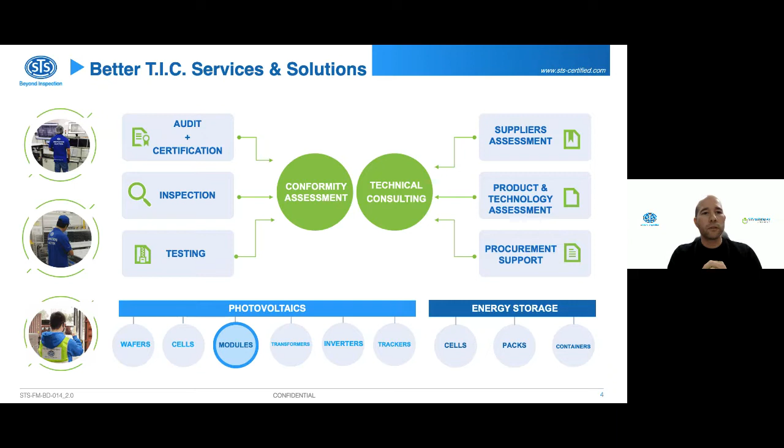Recently, we've completed a few projects. You can see a few of them now on inverters and on energy storage. We've got some exciting projects going on. It's not just a few days at the factory, but we are talking about months-long presence at the factories, whether we are following up R&D projects, products being developed, or whether we are really tackling more acceptance testing at the factories before shipment. And some of them happening at the power plant as well.

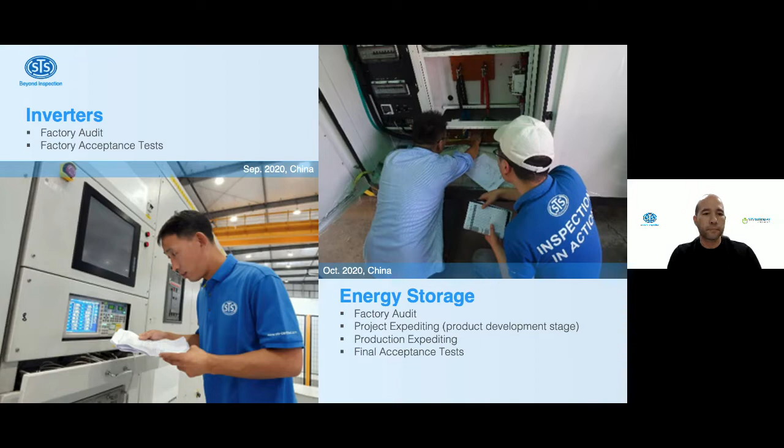So really you will start seeing STS present at many areas of the procurement and the lifetime of the power plants. So now you've all tuned in to hear our inputs on large wafers and large PV modules. So I'll give the floor to Frédéric, who is going to address those topics. Thank you.

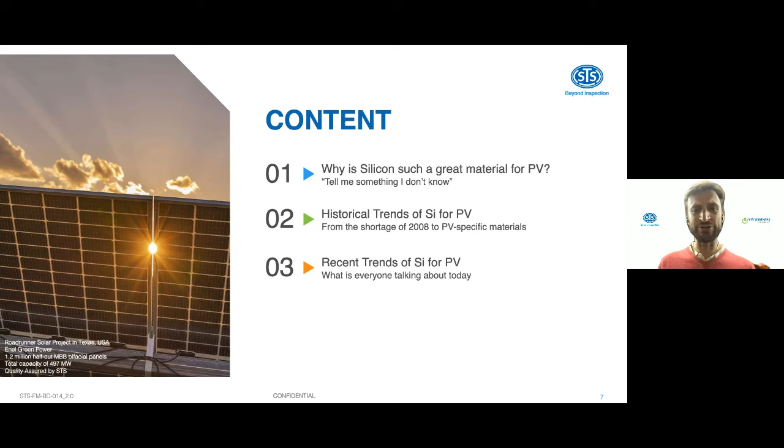First, I actually want to try to capture your attention by trying to find something that maybe not all of you know about silicon, although a lot of you have been in the field for a long time. So I'm going to take the challenge to tell you something you don't know. Then we're going to look at the historical trends of silicon for PV, and then we're going to look at the most recent trend that Alex touched a little bit upon. But first, why is silicon such a great material for PV?

Well, first of all, silicon is one of the most abundant. It's actually the second most abundant element on Earth. Some people in the audience will know that. It's still quite surprising to me that almost 30%, so almost a third of the Earth's crust is made of silicon. So go ahead, guys, install as many megawatts or gigawatts as you want. We will never run out of silicon.

And actually, even if the Earth runs out of silicon, silicon happens to be also the 7th most abundant element in the universe. So even if we run out of silicon on Earth because of PV, we will always be able to find some in the universe. As a matter of fact, cosmic abundance is usually cited in terms of number of atoms of the particular element per million atoms of silicon. That's just to give you the idea of how abundant silicon is in the universe.

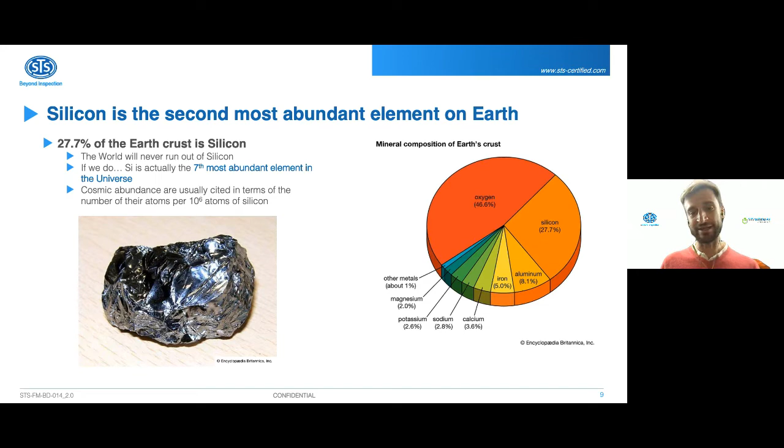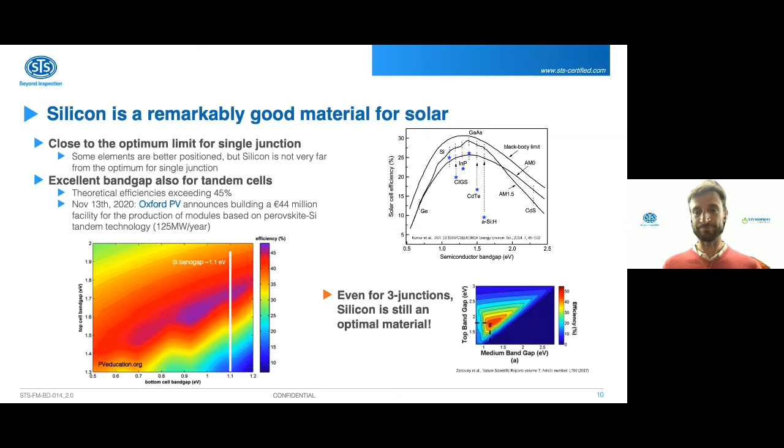And then if you were not convinced that silicon was really an incredible material for PV, when we want to go to 3-junction to go even further in terms of efficiency, well, guess what? Silicon is still an optimal material, this time for the medium band gap. You see that 1.1 is very close to the optimal band gap for 3-junction. Okay, so that was a short introduction on silicon.

Let's have a look now a little bit in the past, and let's see the historical trends of silicon for PV. And I want to start with actually the price of polysilicon because this story is quite interesting. So the price of polysilicon, when you monitor it since the 1970s until today, you realize that during the first 2 decades, it was following a cycle, and the cycle is actually well known from economists.

It's a cycle from commodities that take time to mature, and typically they refer to this type of cycle as the pork cycle. Basically, you have some demand for more pork or cattle, and then the prices go up. So you end up with a shortage, and at this moment, everybody thinks, oh wow, it's a good idea to breed pigs because the prices are high.

So everybody at the same time starts breeding pigs, and when a couple of months or years later, all the pigs are ready to hit the market, well, everybody is ready at the same time, and the prices collapse. The market is not attractive anymore, so people leave the market again, and then the prices go up again, etc.

You have a typical cycle due to the fact that it takes, and polysilicon is the same, several years to build a polysilicon factory. So you have these cycles which simply follow the cycle of capacity of polysilicon. But then what happened?

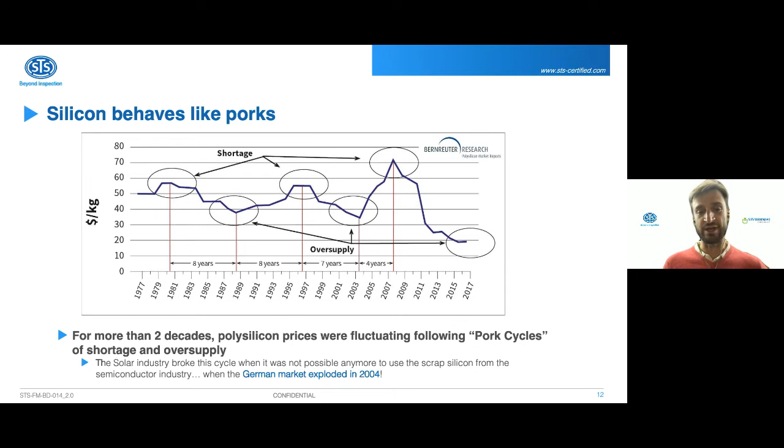And this surge was such that the material that was fabricated for semiconductors was actually not enough to feed the entire PV industry. And then you ended up with spot prices hitting close to $500 per kilogram. So that was really a very sharp peak.

And then everybody at this time thought, okay, that's a very expensive material. I'm going to build a plant so that I can put this material on the market. So there were a lot of plants that were built. Even module makers went upstream and built their own plant to ensure security of supply. So from 11 plants in 2004 to 61 in 2010, just to give you an idea.

All these plants arrived at maturity at the same time, so you can imagine the pork cycle took place again, and then the prices completely collapsed in 2009-2010. Other venues were tried, such as upgraded metallurgical grade, and there was also a performance indicator: you wanted to have as many watt peak per gram of silicon.

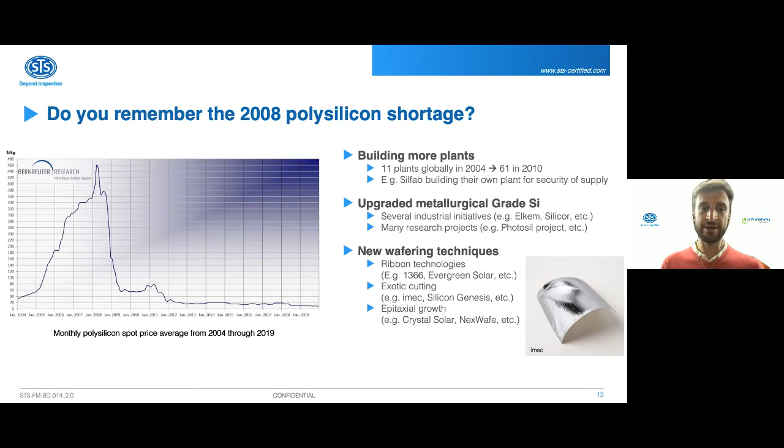So a gram of silicon was really a resource that was hard to get, so expensive, and there were wafering techniques, for instance, to reduce the amount of silicon per watt peak. Nowadays, most of these ideas have been abandoned because there has been a strong ramp up of polysilicon facilities, especially in China. But this effect was quite strong.

It was actually so strong that you see it on the learning curve, sometimes called the Swanson law, which plots the module price as a function of the cumulative module shipments. So typically, every time you double the cumulative module shipments, you decrease the price by about 20%. And you see that there's a bump here on this line, and actually the 20% is a fit.

And depending on whether you take into account this bump or not, you will have another learning factor. 20%, just to give an idea, is about a 75% price drop every 10 years. I think in the last 10 years it's been a little bit steeper, so we have actually dropped a little bit faster. It's more like 90% in the last 10 years, about 10% price drop per year.

So from a good to a bad, we actually now have our own polysilicon supply, and they are in the recent news. We will see that at the end. There has been a lot of movement on the supply of polysilicon.

So the metrics of grams of silicon per watt, or watt per gram of silicon, may actually come back, because the polysilicon is responsible for 70% of the energy demand of one module. So in markets where the carbon footprint may be an argument, you may have some comeback of these kinds of ideas, or at least moving the polysilicon plants to carbon-free, carbon-neutral, low-carbon energy sources. So that's one trend I wanted to talk to you about.

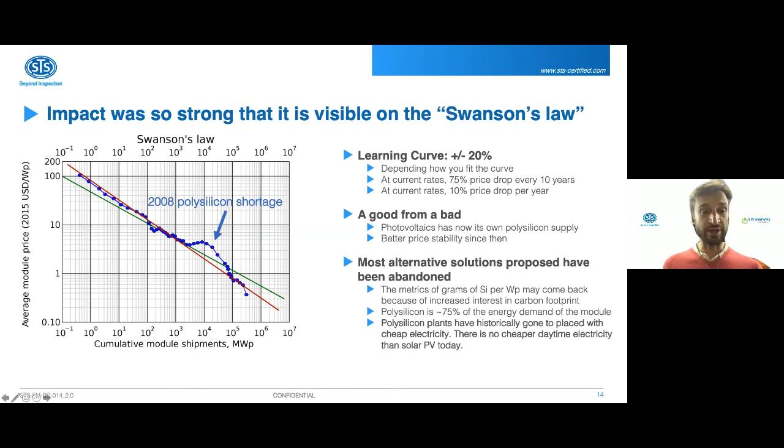Somehow the technology was favorable to the multicrystalline players. For instance, with the apparition of quasi-mono, the apparition of high-performance multi, and simply economies of scale, it was looking as if monocrystalline was going to disappear for PV. But recently, what happens is actually the opposite. There were some large investments from some Chinese companies, including in R&D, and I want to say Longi here, from 2015 to today, which have been really boosting the monocrystalline material.

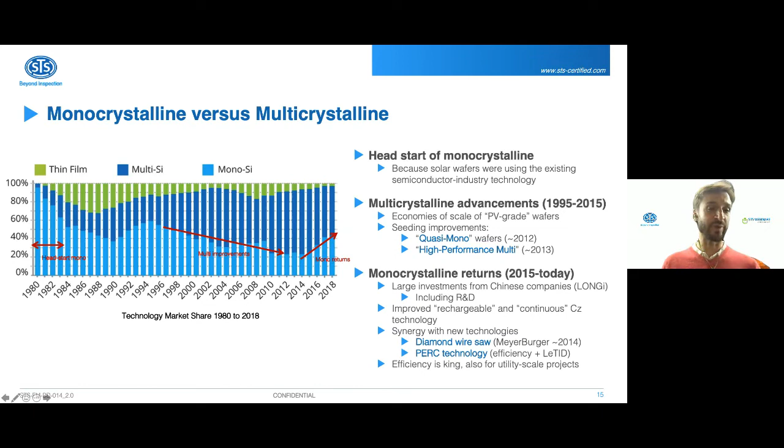At the same time, there have also been some new technologies developed which happen to be synergetic with monocrystalline. Diamond wire sawing, for instance, works much better with mono than with multi. And the PERC technology as well. In fact, one of the problems found with multicrystalline for PERC: it is possible to do a PERC cell on multicrystalline wafers, but you have what is called LeTID, light and elevated temperature induced degradation, and this new degradation mechanism discovered around 2012 is much more severe on multi. So that is a boost for mono.

And you may say, okay, but mono still has the traditional historical boron-oxygen LID issue, which is very pronounced in mono PERC. It's more pronounced than in multi. Yes, that is true. However, there are some industrial solutions now available, which we see in the factories, to remove this light-induced degradation phenomenon.

LeTID is still not completely understood. It has been observed in mono PERC. It has been observed even in float zone wafers. It has been observed even in N-type wafers. But still, when you look at the data, multi is hit harder, and that is a difficulty for multi.

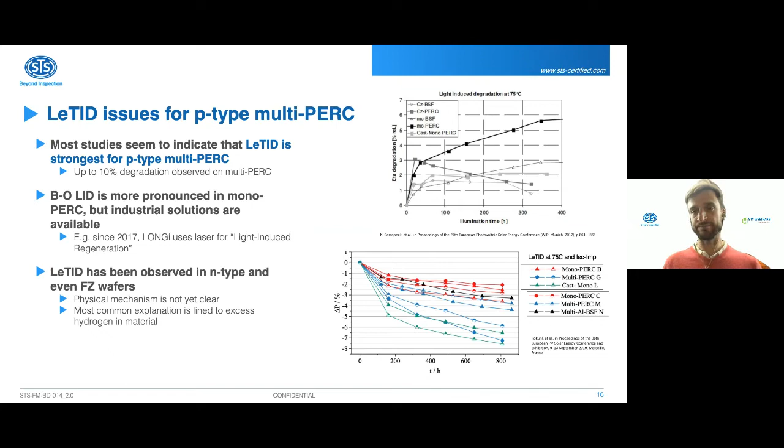The last historic trend that I want to talk to you about is N-type versus P-type, also very historic. This time P-type got a head start, mostly for reasons of better resilience for space applications. However, most of the highest efficiencies are done on N-type. In fact, today the record efficiency held by Kaneka is indeed on N-type material. N-type is also free of boron-oxygen, and it is even claimed that it's less sensitive to LeTID, but this is still a little bit under discussion.

But somehow N-type had up to now some technology barriers that were difficult to overcome. The boron emitter growth or diffusion is a problem with the boron skin. The growth of phosphorus silicon is also an issue. So it is a little bit more difficult to do N-type, and that's one of the reasons why it's not the dominating technology today.

But it may change, and quite fast actually, because there are a lot of very strong companies investing very heavily in N-type. In fact, companies like Jolywood are betting their entire roadmap on the improvement of N-type structures. And there are actually two technologies competing. So maybe in a year or two we will be together again, and I will describe the match between TOPCon and heterojunction emitter on N-type wafers.

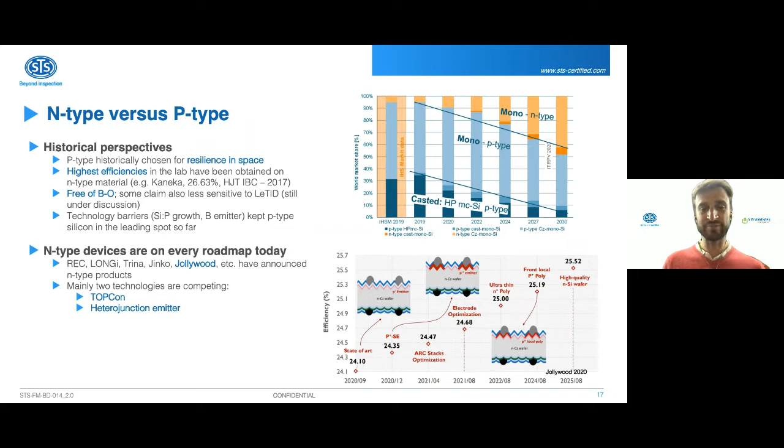But okay, on to the recent trends, what everybody is talking about today. As Alex introduced at the beginning, one of the really strong trends in 2020 is the increase in wafer size. There has been a steady increase of wafer size over the years, but it has accelerated quite dramatically in the last few months.

Today, M6 wafers, 166 millimeter, is most probably the dominating technology in 2020. However, it was not the case in 2019, and it is likely not going to be the case in 2021 because there are a lot of announcements and a lot of investments which are made on two actually competing technologies. One of them is the M10 wafers, which is 182 millimeter, and the other one is the G12, which is 210 actually square wafer.

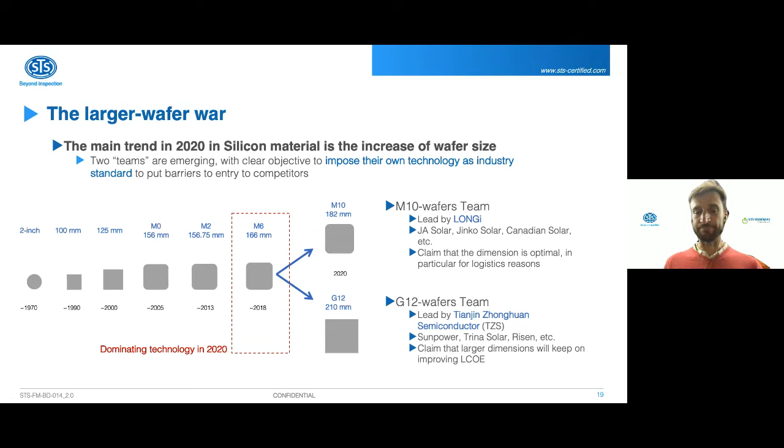And what is interesting is that there is some kind of, I don't know, a match, a war between two gangs or clans that are competing. They're competing for what? They are simply competing for the domination of the market in the next few years. We know that it's very expensive to invest to launch a new technology, and if the market adopts one or the other technology, then all the investment that the other group would have done will be relatively obsolete.

And that's the case, for instance, for the people who have heavily invested in polysilicon, in multicrystalline silicon. For instance, GCL has a lot of cast multicrystalline silicon, which starts to become obsolete. So it's really fighting for the domination of the market. And both of these groups are proposing and claiming that we as an industry should take their proposed solution as a standard. LONGi first in June 2020, and then recently in November, Zhonghuan and the group behind actually proposed a standard on 210 millimeter square wafers.

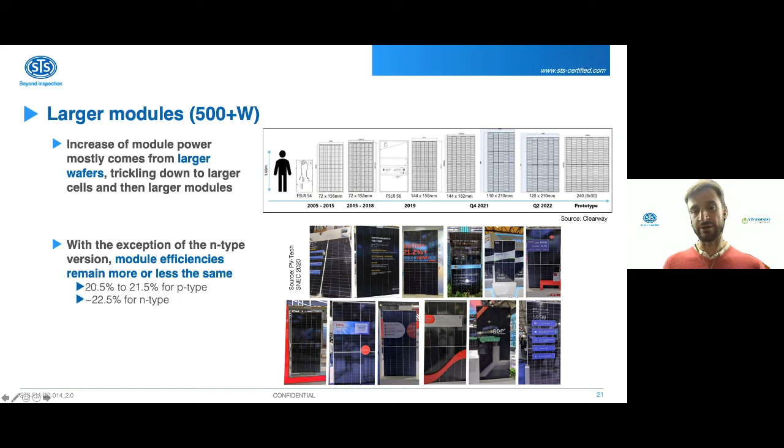So larger wafers trickle into larger cells, which trickle into larger modules, and that's the reason why we see on the market much larger modules. These are all the pictures of the 500 plus. So you realize that I use 500 plus, so higher wattage, similarly to larger modules. In fact, we have not seen any increase in efficiency. The efficiency remains more or less the same. The main difference is in the size of the modules.

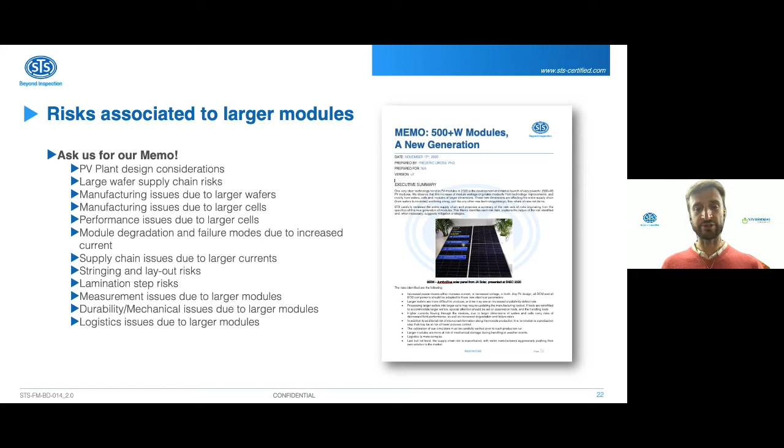Let's have a look at a few. I have 3 different slides which show the few risks that we have identified, which are described in this memo. So the first is all the risk associated with processing of larger wafers into cells. The obvious one is most probably the wafer breakage. If you keep the same thickness, or even go down in thickness to save material and to save costs, down to 160 micrometer, handling larger wafers becomes a challenge. Some of the tools are very advanced to handle large wafers, and it just becomes more and more challenging when the dimension is increased.

Another risk is the surface passivation. Most of the new technologies will actually rely on some kind of thin film deposition. PERC, for instance, you have a PECVD thin film on the front as well as on the rear. TOPCon, which is viewed today as what looks the most as a drop-in solution beyond PERC, relies on a tunnel oxide which is only a few nanometers thick. So very thin layers. Heterojunction, the same. They rely on tunnel transfer of electrons to the electrodes, and that is a very thin layer.

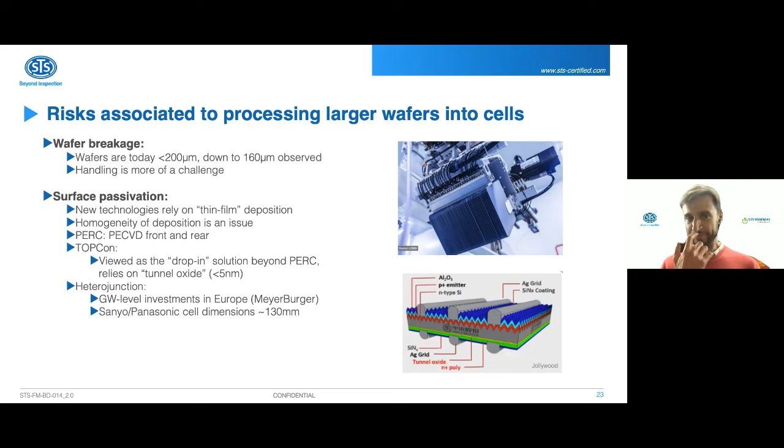Now, if you look at the next step, so from cells into modules, you see that, well, when you're bringing more cells, larger cells, you run into a problem. You absolutely don't want to increase the voltage. Actually, most of the new modules have, if anything, a lower voltage than the traditional ones, because you want to put as many modules on one module string as possible to reduce the balance of system costs.

But then, okay, if you increase the wattage and you cannot increase the voltage, then you have somehow to increase the current, and that is exactly what a larger cell does. So you have to have ways to mitigate the increase of currents coming from the cells. And that comes from cutting the cells, sometimes in 2, sometimes in 3.

That comes also from increasing the number of ribbons, finding other ways to interconnect, like shingling or partial shingling, tiling ribbons, seamless soldering. Basically, every big brand has its own way of doing interconnection that will reduce the series resistance and therefore the impact of larger currents. That is the goal of most, if not all, of this technology.

So we have an addendum in the STS standard, which addresses exactly the problems that you may have with laser cut cells and with multi-bus bar.

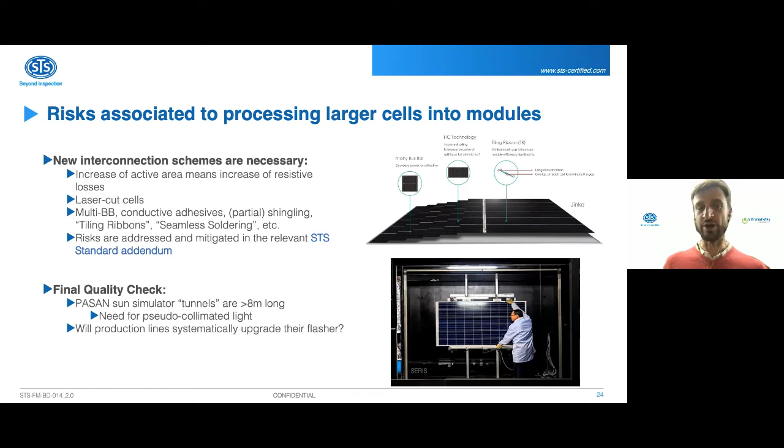Now moving on to larger modules in general, there are a couple of questions people ask themselves. Do larger modules run hotter? If you have higher currents, it would be natural to expect that.

However, with what they call twin modules, where you have a higher number of strings which are only recombined at the combiner box, you may control the current. There are ways to limit the current into the module, but still, it is a point of attention. We should be careful with that, especially because a higher temperature of operation will also increase your degradation rate.

I think the rule of thumb is something like a 10-degree difference in operation will increase your degradation rate by a factor of 2. So it's significant.

Then a lot of people are also talking about the logistics. Larger wafers - how many can you fit in a standard container? How many people do you need as an EPC to put the modules together? Actually, this is one of the arguments from the M10 team to try to push their standard. They say that the logistics will not work for G12, and you have to stay reasonable and go to M10. It's one of the reasons.

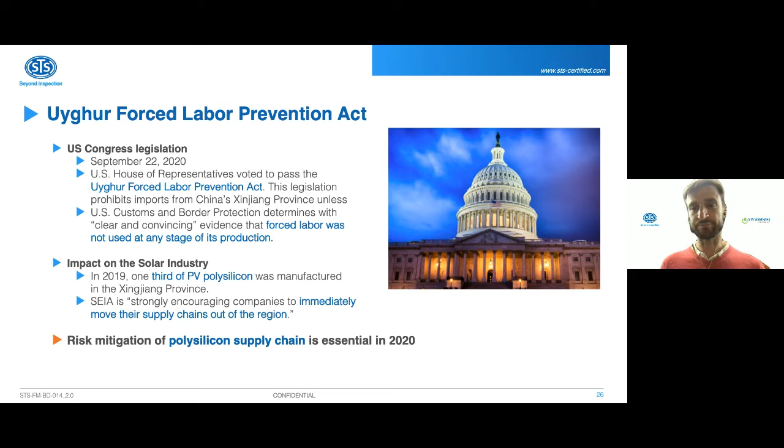And I want to finish with that. There has been indeed a lot of movement in the wafer supply chain. Just very recently, in the last 3 weeks, Risen Energy enters polysilicon production. JYT Corporation, a PV equipment company, is building a silicon ingot manufacturing plant at 24 gigawatts. Jinko partners with Tongwei. Trina partners with Zhonghuan. Trina also partners with Daqo. So there have been a lot of announcements, a little bit like the entire supply chain was preparing for a disruption very much upstream.

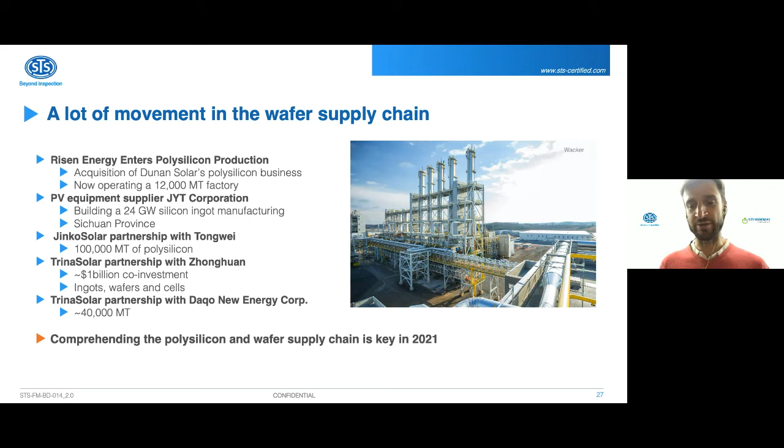So that is really something to keep an eye on, and I invite you to do so. We're welcoming any question or any solution that we can bring to you for that.

As my summary, silicon is actually an exceptional material for PV. Sometimes we don't realize how lucky we are to have this material. Since the 1970s, there have been many variations of silicon PV, and there have been historical matches between mono and multi, P-type and N-type. Maybe the next one is TOPCon versus heterojunction, and after that M10 versus G12. Today, the material, the upstream part of the supply chain, remains really at the forefront of relevance for everybody working in the PV markets.

So with that, I would like to thank you for your attention, and we are now opening the Q&A session.